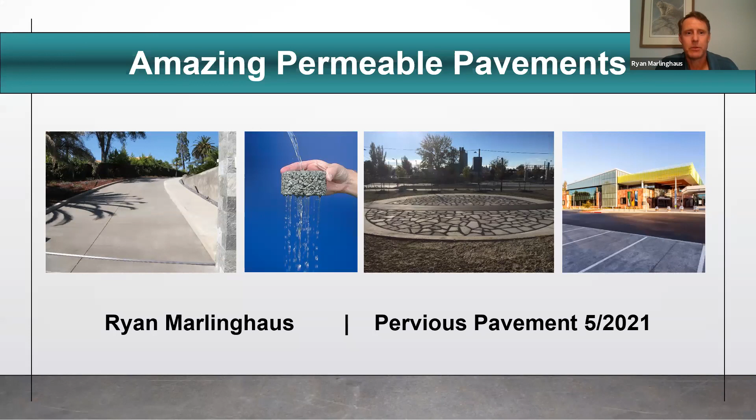Today, the agenda is to talk a little bit about the problem to begin with and how pervious pavements can help address it. And then we'll talk about the types of pervious pavements, the ins and outs, details, even go through cost.

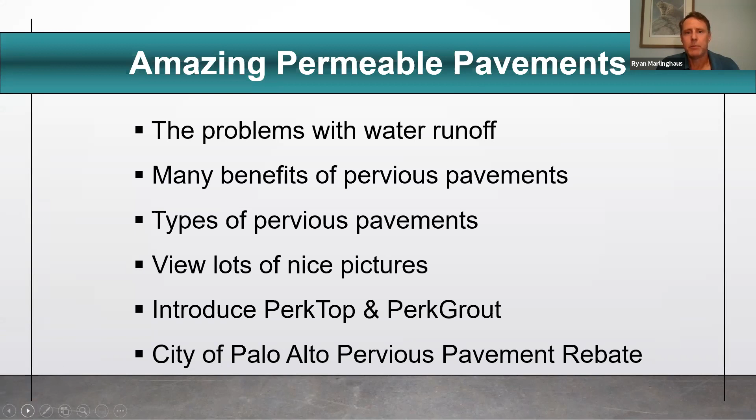A little bit about my background. I started a landscape business quite a while ago and was always focused on being environmental as well as entrepreneurial. About 20 years ago, I received recognition from my peers for the efforts in being environmental. Specifically, we focused more on the softscape, and that is the plants. We focused on drought tolerant native plants, so we reduced the amount of water that was used in the landscape.

We were very cutting edge as far as drip irrigation, even using it in regular lawns. We recycled and reused materials. We didn't use any herbicides or pesticides. It was all organic. We did sheet mulching. Our fleet of trucks also ran on natural gas. So those are some of the things that we did to be more environmental.

However, when I really started looking at the embodied energy as far as the carbon footprint of our process, it stood out that the hardscapes, or at least the pavements, were lacking. That was the single biggest carbon producer. So I went about learning more about concrete in particular, which led in time to being introduced to pervious concrete in 2003. In 2005, we installed our first pervious concrete.

Since that time, I've dedicated at least half my time to learning about pervious concrete, studying it, installing it, and promoting it as well. Then 7 years ago, I sold Earth Care Landscaping to focus fully on my company, Pervious Products, today.

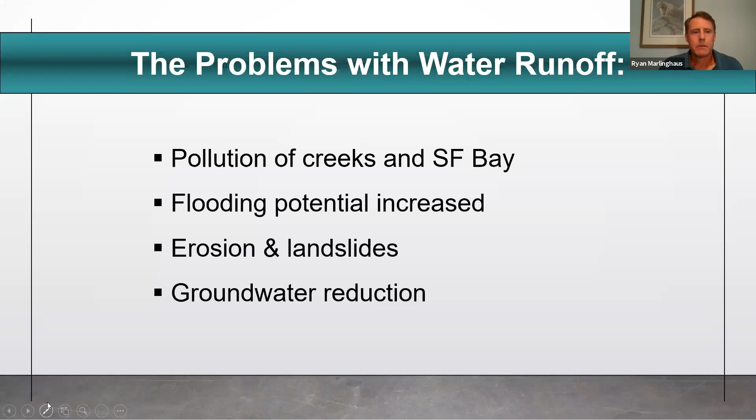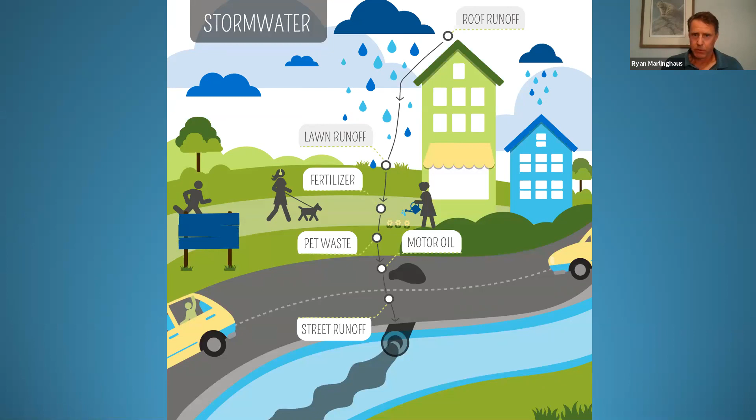So when it rains, all the water that falls on the roof and the lawns takes all that runoff, the fertilizers, herbicides, motor oil, and so forth, and from sources like this, it all goes straight into our storm drain system. And the storm drain is unfiltered. It's basically just a catch basin that dumps directly into the creeks and the bay with no filtration.

One exception is the city of San Francisco, where they actually have a combined sewer and storm drain system. The sewer system is typically a separate system that takes all of the house and office wastewater, and that's treated before it's released back into the bay, or sometimes reused. However, San Francisco's combined sewer and storm drain system poses its own kind of problems. If you get too much rain, it gets overwhelmed, and they can actually dump raw sewage out into the creeks and the ocean.

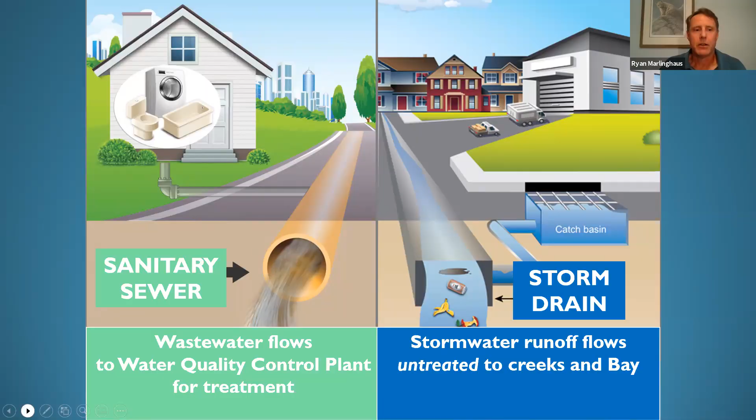So we have an urban situation, even in Palo Alto, where over half of the land area is now covered with impervious surface. The buildings and pavements cover more than half the land, which leads to over 5 times the amount of runoff from a pre-development condition, as well as 5 times less groundwater infiltration to recharge our groundwater.

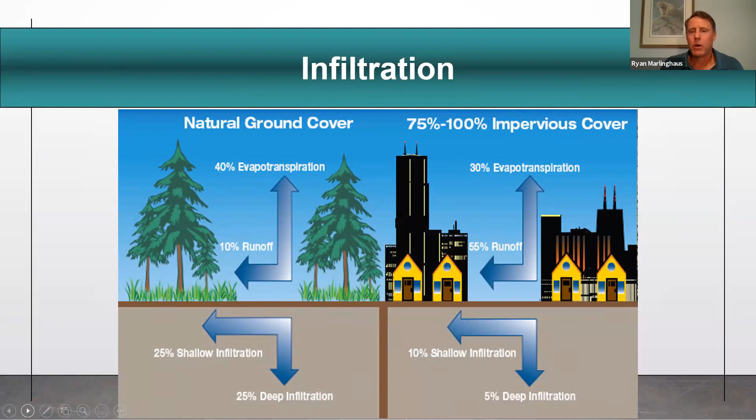So how pervious pavements can help mitigate that is, number one, they mimic pre-development conditions, in that they allow the water that falls on the land to have an opportunity to be absorbed by the land. This can also reduce the heat island effect. Heat island is when all this pavement, in particular the darker pavement, absorbs the heat from the sun and actually raises the temperature of the urban area by up to several degrees.

Because the water and air can get to the roots, now it can benefit trees and shrubs, and allows the soil to kind of transpire and breathe. There's also a natural filtration process which occurs. And this also happens with the groundwater. Groundwater can be some of the cleanest water because you have the soil and the gravel to filter the water as it goes through the ground.

The same can happen with pervious pavements, in that beneficial bacteria build up within the rock and the pores of the pavement and can actually break down pollutants as it goes. And there have been many studies that have documented all the different pollutants this can mitigate.

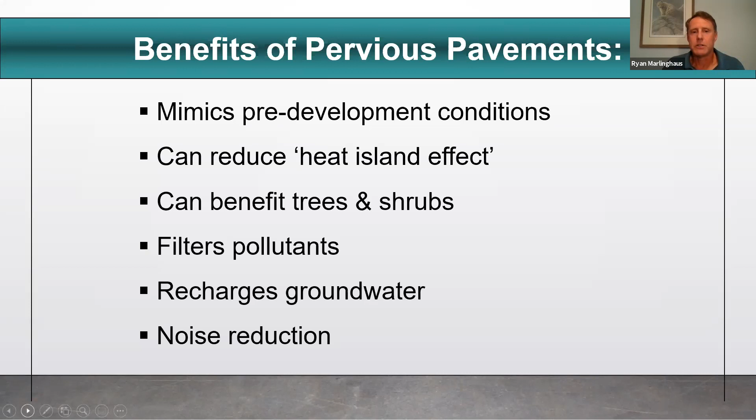There can also be some noise reduction with pervious pavement. In particular for the highways, they cut these grooves in the concrete highways, like on Highway 85. They cut grooves in the highway, and that's done at least in part to reduce the noise from the cars. And so pervious pavements can, by a couple decibels, reduce noise as well. Questions at this point?

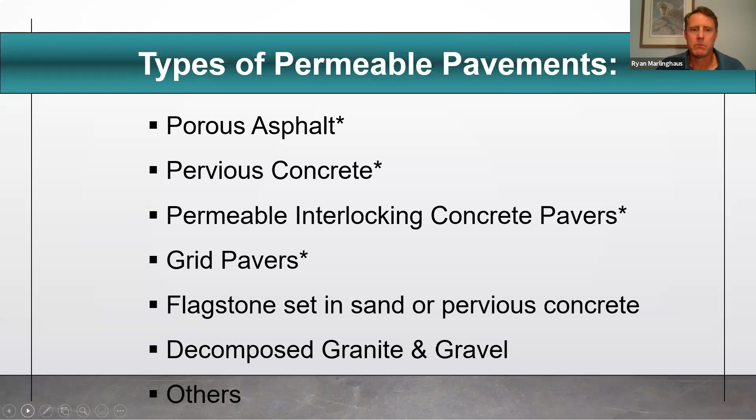No other questions. Okay. So there are many types of permeable pavements, and the ones that are asterisked here are recognized by the city of Palo Alto for the rebate program. Porous asphalt is the one I don't really know much about. Pervious concrete, obviously I do, and the others as well. We'll talk a little bit about them later in the program. You can do these other ones if you're just looking to be permeable, and there are pluses and minuses to each of them, as we'll see.

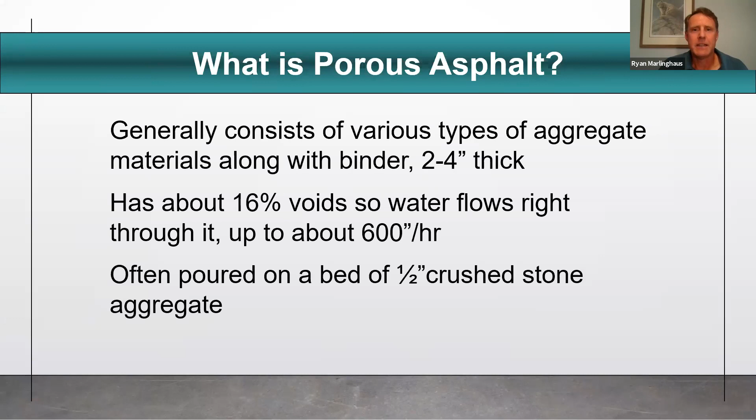Porous asphalt basically consists of a binder and rock without some of the fines in it, similar to pervious concrete, and has a high degree of permeability. A typical cross section can look like this, where you have several inches of asphalt over a bigger layer of crushed rock. What's significant about this crushed rock is it's an open crushed rock, with voids of around 40%. It's basically a recharge bed or a reservoir for the water. Once the water goes through the pavement, it can be stored in this rock before it is absorbed into the soil below.

So say it's 6 inches, you'd have up to 2.5 inches of storage if it was completely level, if we have a big rainstorm over the course of a day. A lot of the soil in Palo Alto in particular can be very clay and take a while to absorb water. But if you have a reservoir, you can store it, and it can slowly make its way into the soil over a day or two.

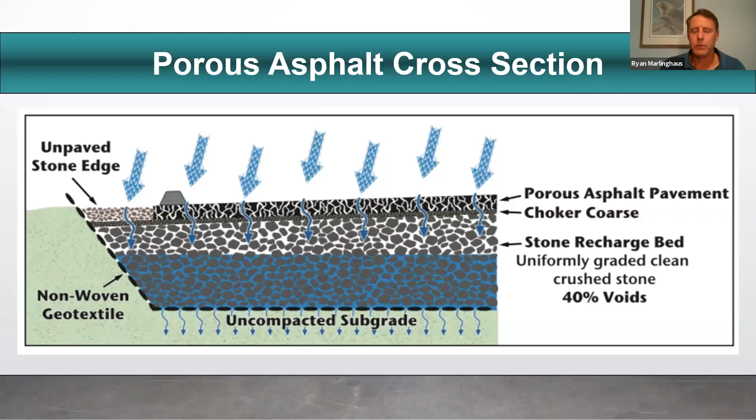Here are some examples of porous asphalt. Here it is up close. On this slide, the one point I want to make is that pervious pavements in general, in my opinion, aren't to be used as a catch basin. What I see on the edge here is a little bit of puddling, and that could be because there's a lot of runoff coming onto the pavement.

So a properly designed permeable pavement will not have runoff coming onto it. Or if you're going to do that, then you need to allow for extra maintenance, because wherever you have impermeable surface running onto the pavement, it's going to bring pollutants and dust and so forth, and could overwhelm the system. In the case of asphalt, it will bring tar flecks that could also clog up the system. So give careful consideration to that, making sure there's no erosion running onto your permeable pavement.

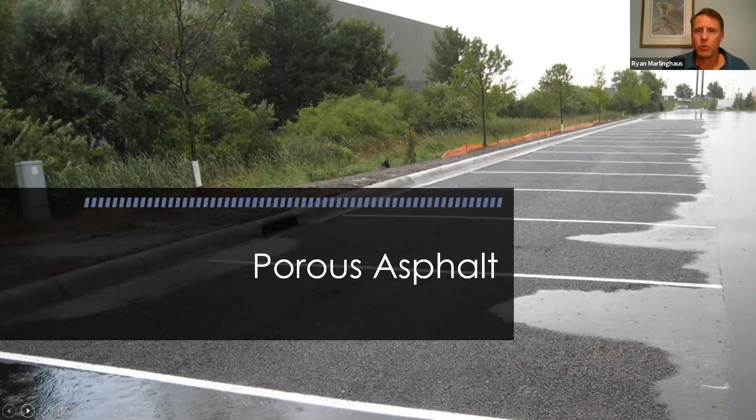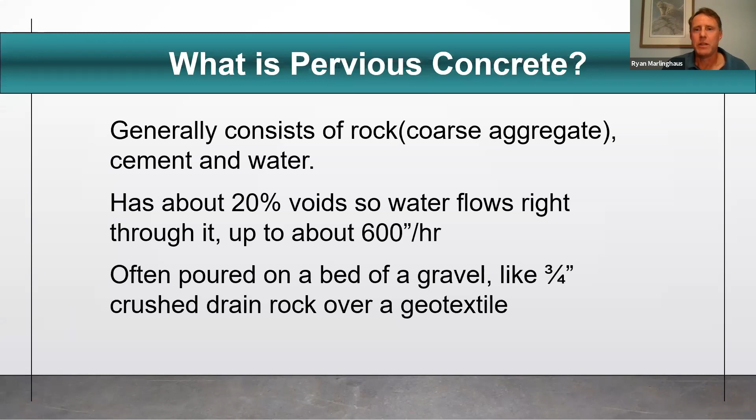And just in general, the more pervious area there is, the less chance it's going to clog. Pervious concrete is basically concrete minus the sand. So it too consists of rock, the binder, which is cement, and water. It also has a high degree of voids, and so the water really pours through it. It too is placed over a bed of gravel.

Now, typically when we've installed pervious concrete, it's about 6 inches and 6 inches. So 6 inches of pervious concrete over 6 inches of crushed rock. And that's for a driveway. For pedestrian, for walking areas, it could be 3.5 and 3.5 or 4 and 4. And again, the crushed rock layer below will act as a reservoir. It also acts to kind of cushion and minimize the movement of the soil below.

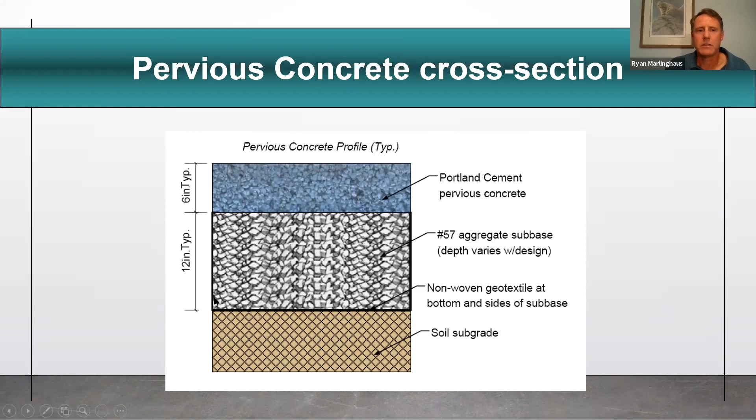And if you have a sloped area, which everybody has to one extent or another, you can deal with that in different ways. You could cut a little deeper in one area and shallower in the other to make your subgrade more level. You can also put berms in to kind of dam the water. You could have a trench drain going across to catch the water as well. So there are ways to address slopes as well.

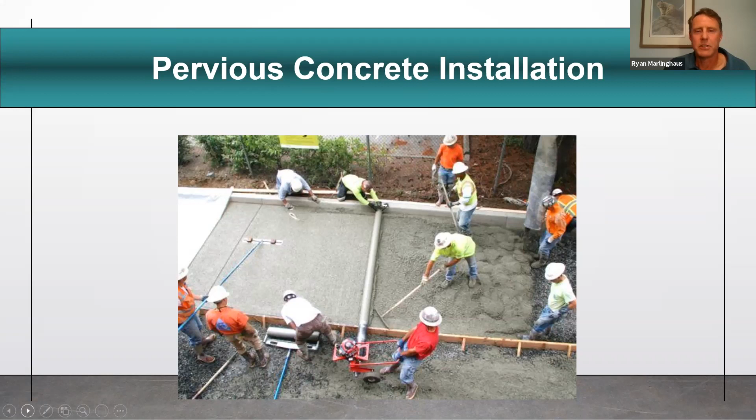A sort of typical pervious concrete installation, non-COVID friendly, with all these guys in one place working together. It's a little excessive as far as manpower, but it gets the point across as far as how pervious concrete is placed. It's placed fast. It's done section by section. As soon as one little section is done, it's not touched anymore. It's covered with plastic to help it cure. It's very sensitive to drying out while it's placed, so you do need to do it quickly and efficiently in consideration of the weather.

Pervious concrete is strong enough. It can support over 7 times the weight of a fire truck, and this is according to the California Fire Code. So when you have a driveway, in particular in the hills, and you need to have a backup turnaround area for the fire trucks, it will more than satisfy that requirement.

So pervious concrete can be a little bit weaker than regular concrete, but the reason concrete fails is because it cracks, not because it falls apart. Concrete cracks over time and starts to move and shift and just looks unsightly. So people want to take it out because of that, but it's not generally failing because it falls apart. And that's the same thing with pervious concrete.

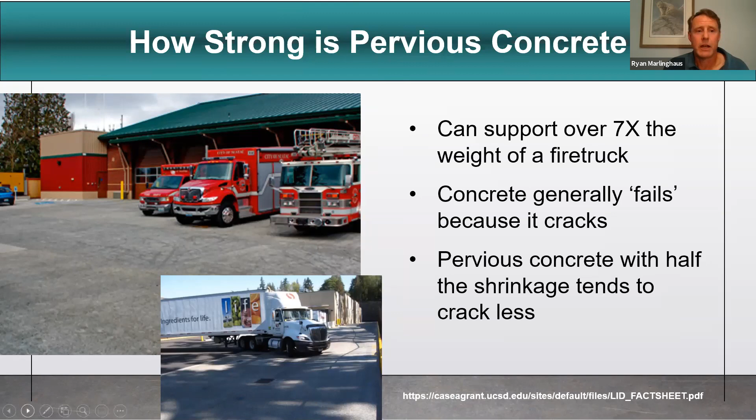There are many reasons concrete cracks, but one of the big reasons is because it shrinks. And pervious concrete, because it doesn't have much water or much cement, tends to shrink less than regular concrete, and therefore it cracks less. And definitely that's been the case for us. We have very little cracking in our pervious concrete. Again, another example.

It can be used in any application, just like porous asphalt, such as low use roads, parking lots, and certainly any residential applications. So kind of a comparison here between the two. Porous asphalt will be less expensive to install. I don't know the exact price; I'm just estimating here, around 10 to 15 a square foot on the asphalt. And that, by the way, also includes all the demo.

In most applications, we're talking about redoing an existing site, maybe taking out an existing asphalt or concrete driveway, or at least digging out soil. So I've allowed for that. It should be accurate to a typical homeowner situation with an existing home. The pervious concrete is definitely going to be lighter, so that'll help with solar reflectivity and minimizing the urban heat island effect.

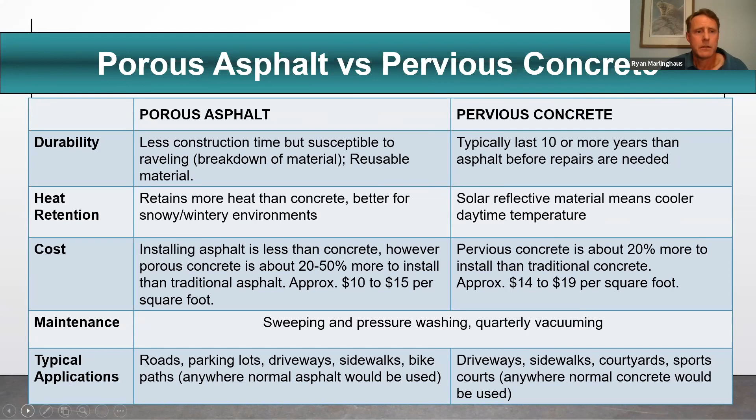Again, the applications will be similar for both of them. The maintenance, I think, can be minimal. If it's done correctly, where it's not being treated as the catch basin, then maintenance can be quite low. It's when you do have other areas running onto it that you'll definitely need to pay more attention to maintaining that permeability. And I guess also it's coarser, so bigger voids, so you can get debris like leaves stuck in there, and then maybe over time that builds up.

For our PerkTop, which is finer, and we'll talk about that later, we've done actually no extra maintenance. And as far as I know, it's still very pervious. Now, if it should get clogged up from sand or dirt being dropped on it, at least a lot of the permeability can be restored by pressure washing. And they have other specialized equipment that actually pressure washes and vacuums at the same time as well. It can be used on larger areas.

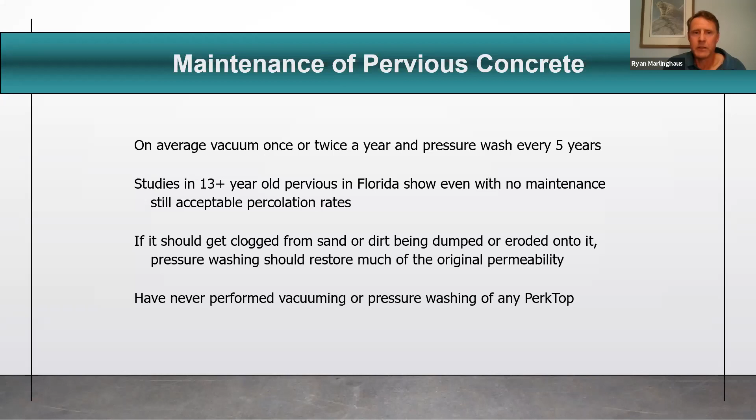But typically just regular maintenance, especially for homeowners, maybe a little more than what you do as far as blowing and sweeping, is generally what's required, unless you have a situation where you have a lot of runoff.

Questions at this point? We do have a bit of questions, Ryan. Okay. We're going to start off with this one. So do you need to have a reservoir to use porous asphalt? How would this material do in shifting clay soil?

I think you definitely need the reservoir, or you need the rock below the porous asphalt. Porous asphalt, or asphalt in general, is only poured 2 to 3 or 4 inches thick at the most, and it relies upon that gravel layer below it for structural support and to mitigate the changes in the soil below. So you do need some kind of rock below, definitely in that situation.

Porous concrete being more structural, in some situations you can do it without rock below it. And I know they did a long pervious concrete path in Cupertino by McClellan Ranch, and it was a sensitive area along a creek. And so specifically, they did not put rock below it and poured it more or less on the soil, but also the soil drained well.

And there's areas in San Francisco where you have really sandy soil. In that situation, you could do it right over the soil there. In that situation too, you may be able to do porous asphalt over sandy soil as well. I don't know as much, but in general, you will definitely want a rock base.

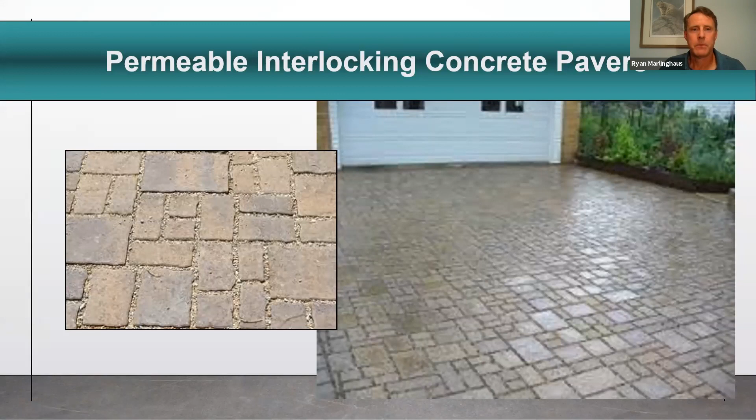Okay, on to permeable pavers, which generally are considered to be a normal interlocking paver that has a wider joint. So it's 1/4 inch to 1/2 inch wide, and that joint is filled with gravel. And so obviously when it rains, there's a high degree of permeability in that gap now, versus before where they're typically just butted up to each other.

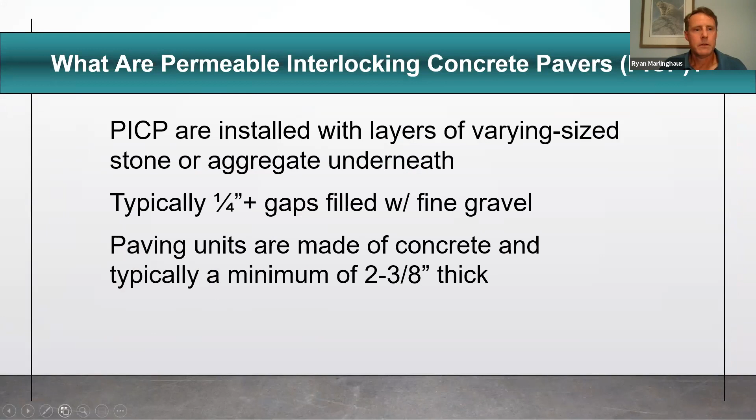And they are also placed over layers of rock. Typically we add a couple different layers of rock. This bottom coarser layer can be made up of 1.5 inch rock, and then a 1/2 inch or 3/4 rock would go over that. And then you have a fine bedding course about 1/4 inch thick that the pavers themselves would be leveled off and set into.

Now, when we install permeable pavers, we typically try to get a 1/2 inch crushed rock and just use that with the 1/4 inch bedding course to set the pavers in, and I don't remember, but you might better do a 3/4 and a 1/4. What you don't want to have is 1.5 inch rock on the bottom and then the 1/4 inch rock on top, because of course it would just settle in. So you need to have some similarities between the sizes of the rock.

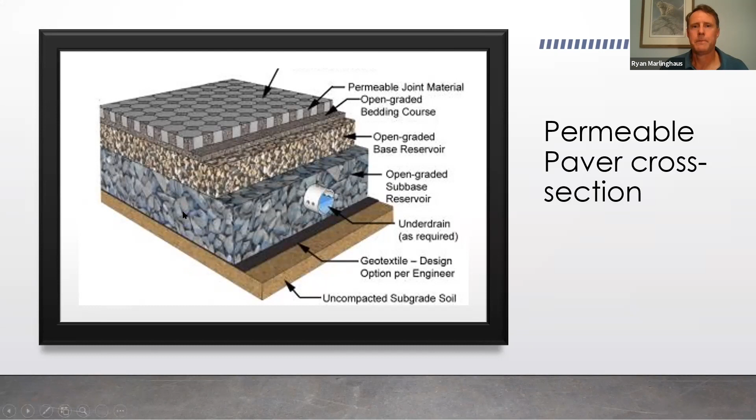Here's another example of permeable pavers. However, I will also mention that there is a paver that's actually permeable. Pacific Interlock makes a paver called HydroFlow. And this paver has at least 100 inches an hour permeability. It looks very similar to a normal paver and can be placed similarly with the rock that we talked about, the same way these pavers are set.

And also, I actually moved to Oregon a year ago next week, and I'm still going to the Bay Area to do installations. But up here, we're in the process of making our own pervious pavers, or precast pervious concrete. We're trying to figure out how to do it more economically.

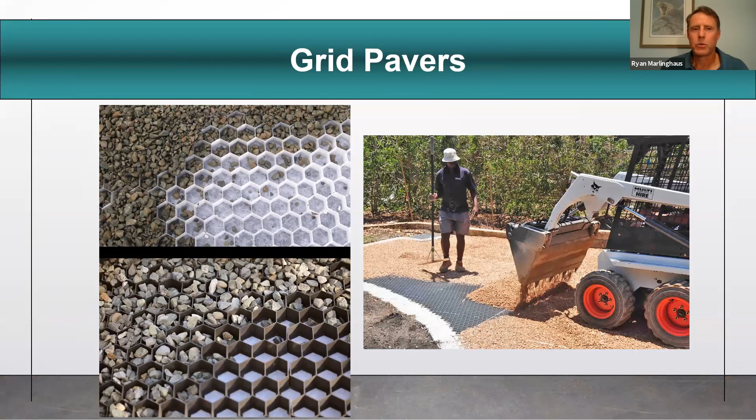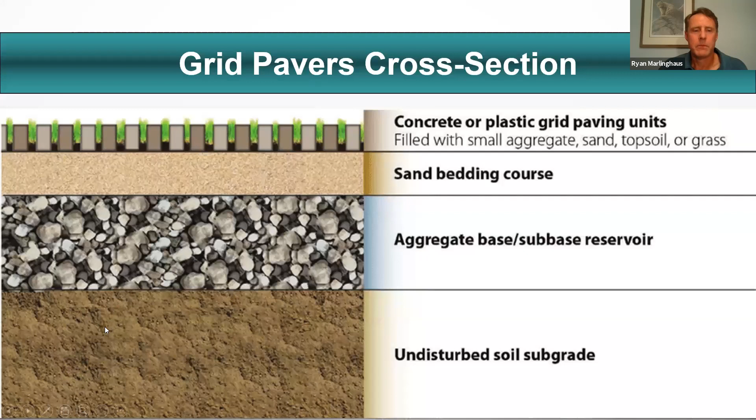Base rock is crushed rock, but it has the fines in it. Could be old crushed concrete as well, but it has the fines in it. So it doesn't have that reservoir, it doesn't have those voids to allow the water to be captured and soak into the ground later, but it does have a high degree of permeability in and of itself. And the mitigating factor would be the undisturbed soil subgrade below. This compacted base rock is what's typically used under most pavements, including asphalt. And then you'll have a little bedding course of sand with a plastic grid above that.

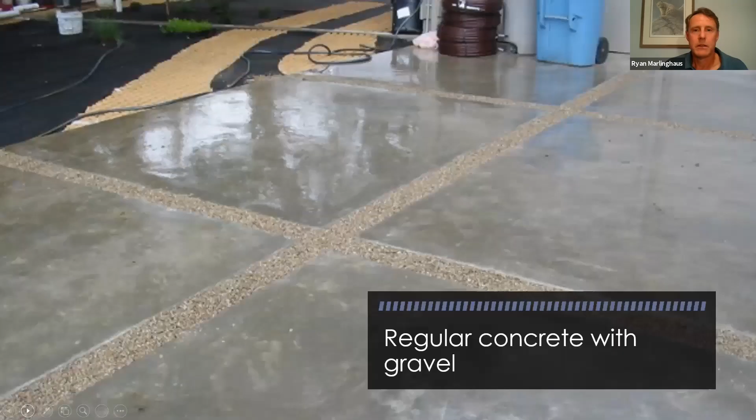And these are the old concrete grid structures, and you can put gravel as well as grass in there, and they can be irrigated as well. This one has some of the grid here. There are 2 lines. This was made specifically for a client of ours who had a vintage car they just brought in and out occasionally, so they wanted to have the grid for that. In this case, the rest of the yard is all this gold rock, this gravel.

And the other thing that we have going on here is that the concrete is just ordinary. It's regular, impermeable concrete, but there's slabs with 6-inch gaps in between. And these gaps are filled with gravel. And then below it is also set on crushed drain rock as well. So this is, again, a non-approved, but another kind of way to do a permeable pavement.

As far as cost, pervious pavers are typically the most expensive of the permeable pavements. That's a combination of the extra effort to put the gravel layers and place the pavers, and the pavers themselves. The combination of those factors makes the cost more expensive. Grid pavers are typically the least expensive. However, it goes up to the higher end when you're using the grass.

So for the grass, you would need more preparation, both in the soil and putting the sod in, as well as you'll need an irrigation system. So it can be very attractive. It's green, that's great, but it can be more maintenance and more expensive to put in grid pavers with the grass.

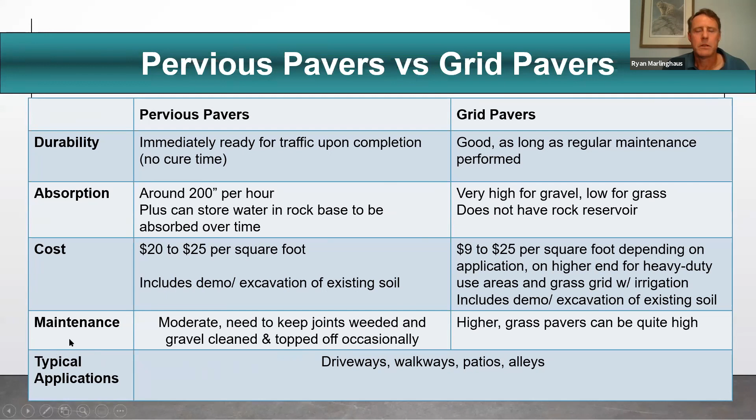On the grid pavers, if you're using gravel, there's really nothing more permeable than that, and it's easy to stay permeable, but it can be harder to keep clean, harder to keep the gravel in place. And both of these can be used in most applications. The pervious pavers, I've seen them on parking lots as well as some city streets.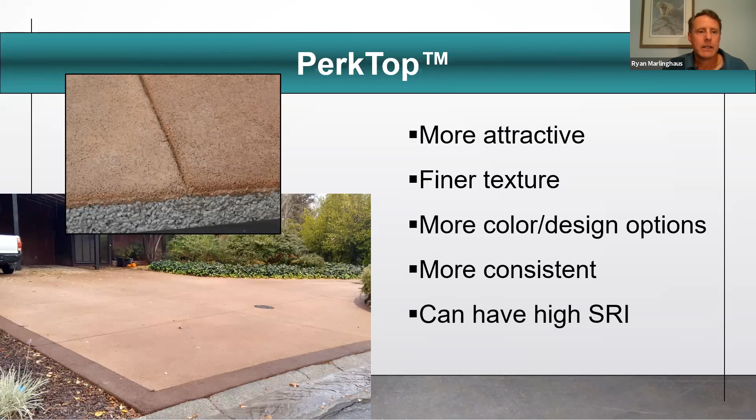So over about 12 years ago, longer than that, we started developing PerkTop, which is a fine pervious concrete overlay to go over ordinary pervious concrete, typically applied about a 1/2 inch thick. It can have high SRI, which is solar reflectance index, meaning it can be lighter in pavement color and therefore minimize urban heat island. And so it's also pervious concrete, but using very specific aggregate and admix.

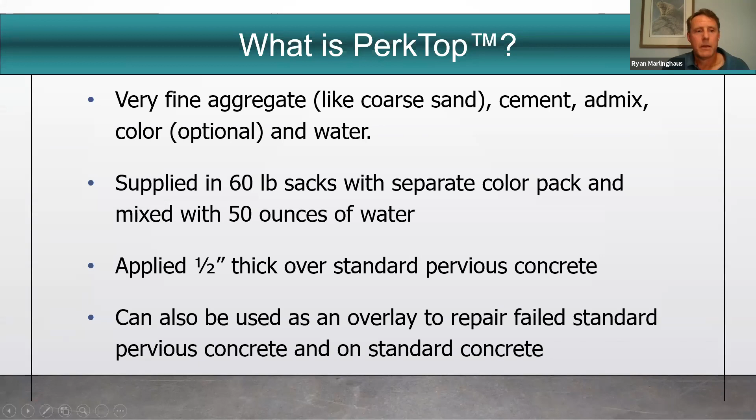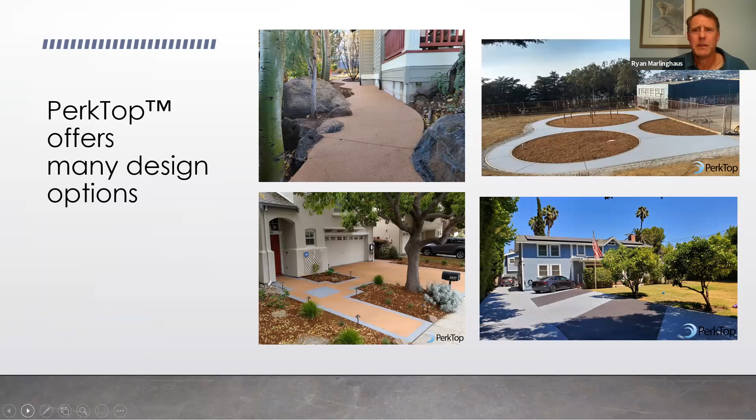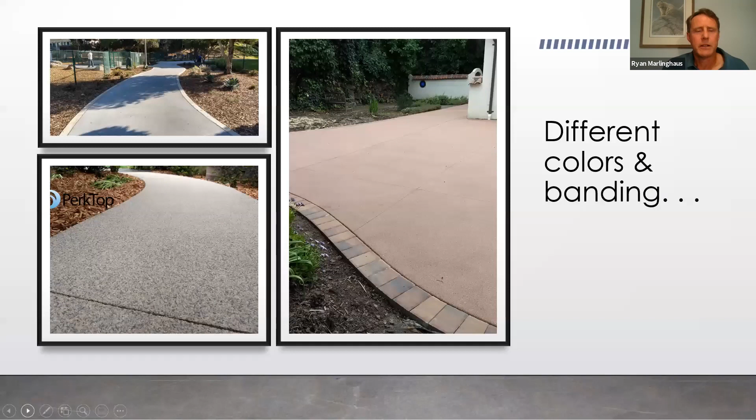It's mixed in 60-pound sacks on site. We bring a ready mix truck to dump the pervious concrete out and mix the top and apply it over top. And here are some examples of all of our jobs that we've done over the years. We've done just about every application. Mostly it's been residential, mostly driveways, but there's been a dog park in Santa Barbara, parking lots, commercial applications.

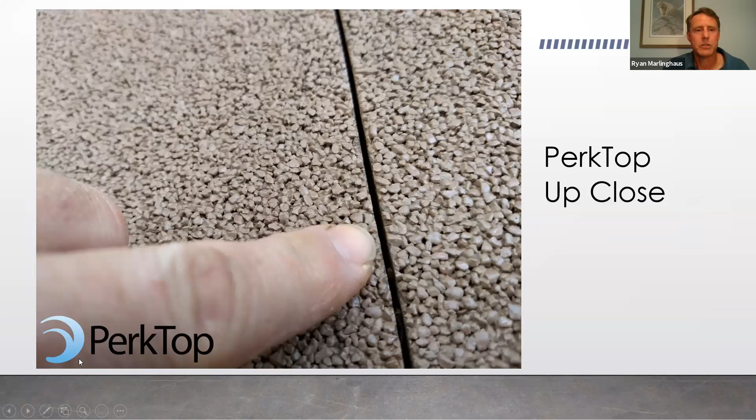And people are mostly purchasing PerkGrout because it is a great solution. It's clean, it's not messy. You don't get rocks moving around, you don't get weeds growing in it. It can be pressure washed. And so it's a good solution for that. But it's also, of course, permeable as well.

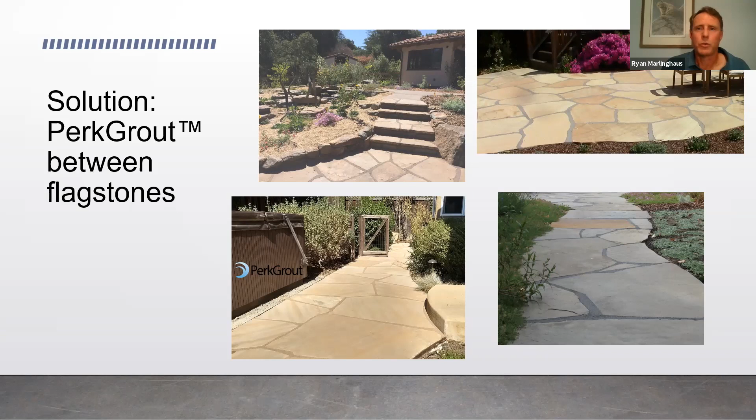A lot of the range and the cost often depends upon the size of the project. So for instance, at least in our case, if it's 500 square feet or less, it's going to be on the higher end per square foot, and could be even more. For us, typically 1,500 square feet is a sweet spot as far as our costs on PerkTop, the most efficient. But for some of the other ones, it won't matter as much. Permeable pavers are fairly straightforward to install, and on a smaller area, it probably wouldn't add as much per square foot.

Okay. What questions do we have now? Go ahead. All right. Well, we have some green and sustainably conscious folks in the audience, which is just great to see. So we have a couple of questions pertaining to that subject.

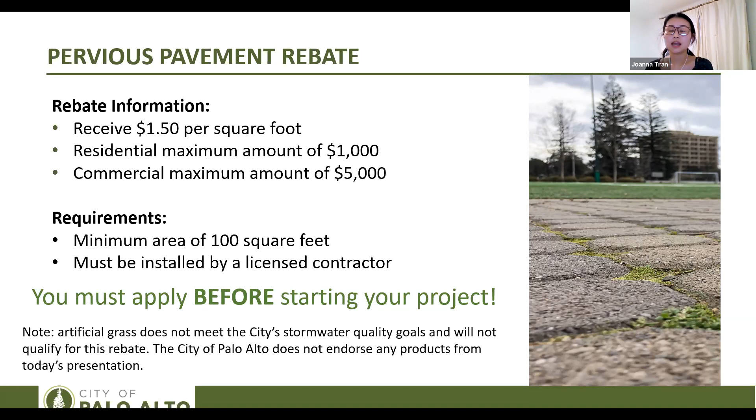All right, so we also offer 3 other rebates as well. These 3 other rebates are in partnership with Valley Water, so we cost share the rebate amounts that end up in your pockets. So first up on our list is our rain barrels. For rain barrels, you could receive a total of $70 per barrel with a size requirement of 40 to 199 gallons in each barrel. And for rain barrels, this is actually our only project that you can self-install, so long as you apply for the rebate first prior to purchasing any materials or starting your project.

Next up on our list are cisterns. For cisterns, you could receive a total rebate amount of $1 per gallon. And we do have a size requirement for that as well. For cisterns, you must have at least 200 gallons or more. And this project must also be installed by a licensed contractor.

I did mention all of the details for pervious pavements in our previous slide, but I do want to also highlight that our pervious pavement rebate is not in partnership with Valley Water, so the application process for this will be directly through the city. And all information for that is available on our website, which I will provide at the next slide.

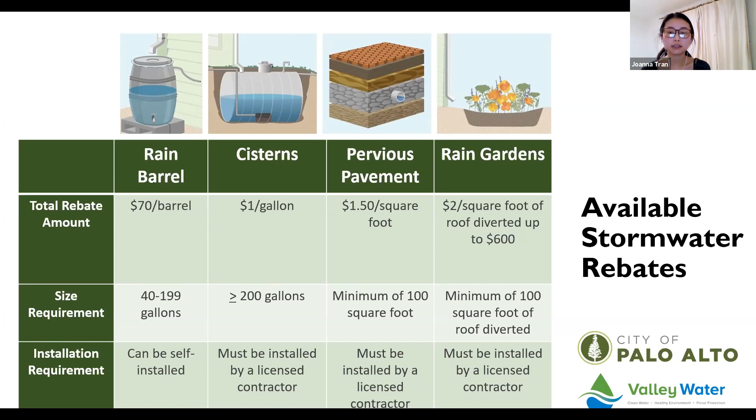So previously, I mentioned that a couple of our rebates are in partnership with Valley Water. Again, those rebates are the rain barrels, the cisterns, and the rain gardens. So for those rebates, you can receive a higher amount since Valley Water and Palo Alto are going to be cost sharing that. So for residential projects, you can receive a total lifetime rebate maximum of $3,000. And if you're a business in Palo Alto, commercial projects can receive a total amount of $55,000. So be sure to take advantage of that and apply for the rebates if you can.

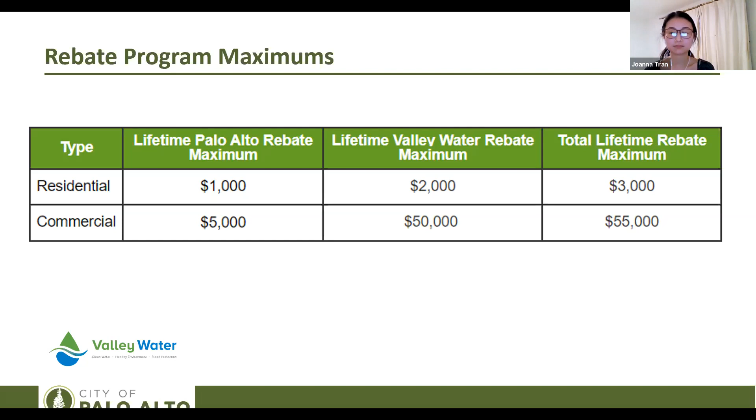And as I mentioned earlier, all of this information is available on our website, which is cityofpaloalto.org/stormwater. For all of the rebates, please be sure to review all of the criteria and the terms and conditions carefully. We do list all the processes step by step for each rebate, so it's easy to follow. For the rebates that are in partnership with Valley Water, you will be directed to the Valley Water website to complete your application. So once you're on there, please review their requirements as well.

And again, I do want to highlight that you must apply for all of the rebates prior to starting any projects or purchasing any materials. Otherwise, the project may not be considered for a rebate. And again, this is all available on our website.

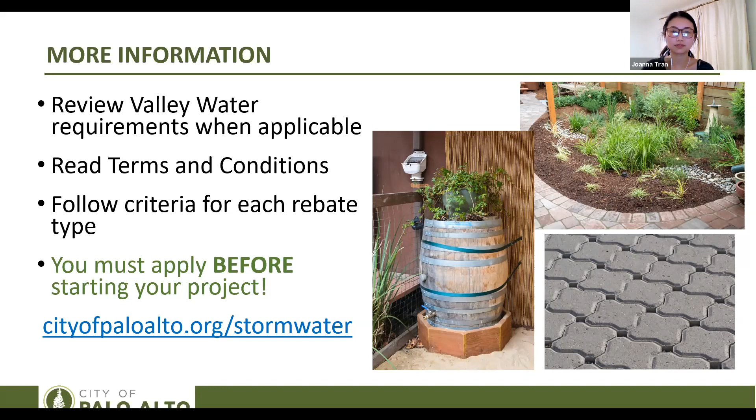And for our landscape rebates, I'm going to go ahead and turn the mic over to Shelby from our utilities department, who will cover what they offer. Thank you, Joanna. Okay, I'll go ahead and cover our landscape rebates. Similarly to what Joanna mentioned about the stormwater rebates, we do offer these in partnership with Valley Water. So it is available to all Santa Clara County residents, although the price of the rebate would be different versus being a Palo Alto resident because of the cost sharing.

Next slide, please. So this is a program that's offered through Valley Water, the WaterWise survey program. They offer indoor evaluations, which you do yourself at home. They can send you a kit, and they also have videos online that guide you through doing the various tests to check for leaks, to check your flow rates, and other opportunities at home to improve water efficiency.

They also have the outdoor WaterWise survey, which is where you would schedule an appointment with Valley Water, and they would have one of their experts come out and do an evaluation of your landscape as well as your irrigation system. They'll make recommendations for replacements and upgrades that would help you conserve water in your outdoor use.

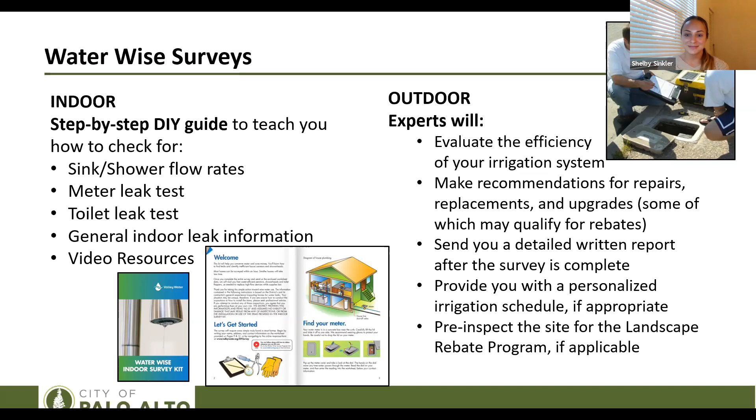Next slide, please. So we also offer a graywater laundry-to-landscape rebate program. This again is in partnership, so we cost share with Valley Water. This particular program is a little more specific in the sense that you have to have more eligibility in terms of the location of where your clothes washer is. It must be near an exterior wall. So it's very important to give them a call ahead of time to see if this is something that would be feasible for you to even install.

They're super helpful if you give them a call over the phone, or even if they come out and meet with you in person. They're experts, and they'll walk you through all the steps that it would take to install a system like this. Next slide, please.

And lastly, one of the most popular programs that we offer and cost share with Valley Water is the Landscape Rebate Program. This encompasses everything from landscape conversions as well as irrigation equipment upgrades. So for Santa Clara County residents, I believe it's $1 per square foot. And then for Palo Alto residents, it's $2 per square foot. And currently, the rebate caps for this are $2,000 for residential customers and $50,000 for commercial customers.

However, I would like to note and inform everyone that the rebate amount is increasing by $1 starting this July. So if you apply now, you would still get the $2 per square foot. However, you have the option to hold off until July if you want to wait for the increased price. So keep a lookout for that on our website as well as Valley Water's website, and the prices will be updated soon. There's also inline drip irrigation conversions, and that is for 25 cents per square foot.